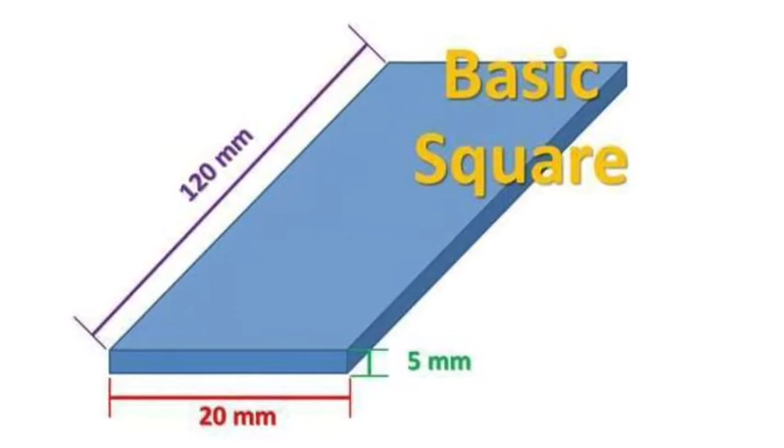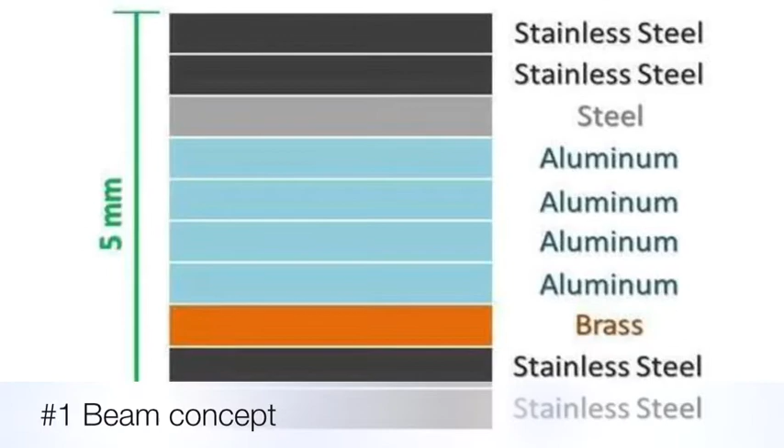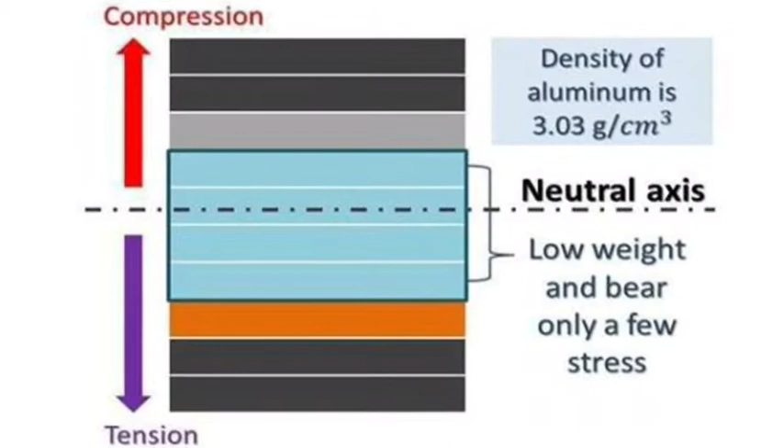We design our first beam as a basic square. We use only one plate of brass because its density is high and not quite strong. As well as the steel, we use only one plate, but stainless steel is much stronger, so we position it on both sides. And because the middle of the beam has to bear only a little stress, we use a low-weight material such as aluminum.

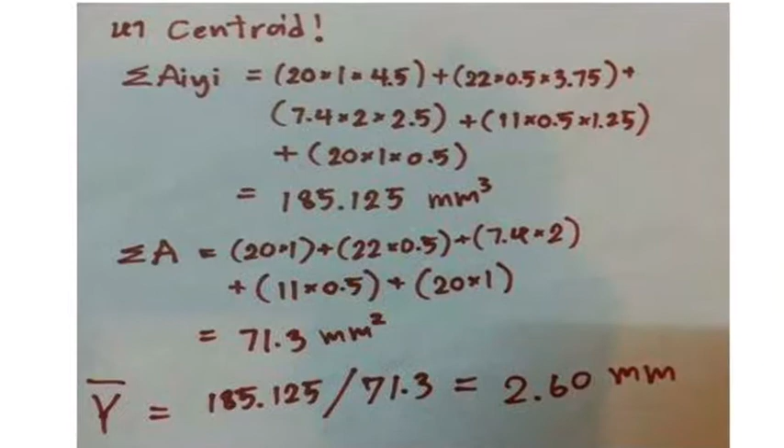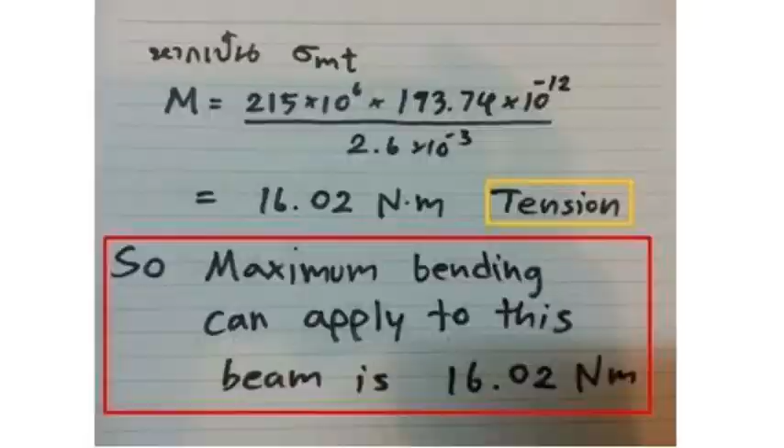Next is our calculation. So we decide to transform all of them into stainless steel. We have to find the centroid. It is 2.6 mm from the reference. We can calculate the maximum bending moment, where the tension side gives the maximum bending moment. Finally, we can find the maximum force is equal to 640.8 Newton.

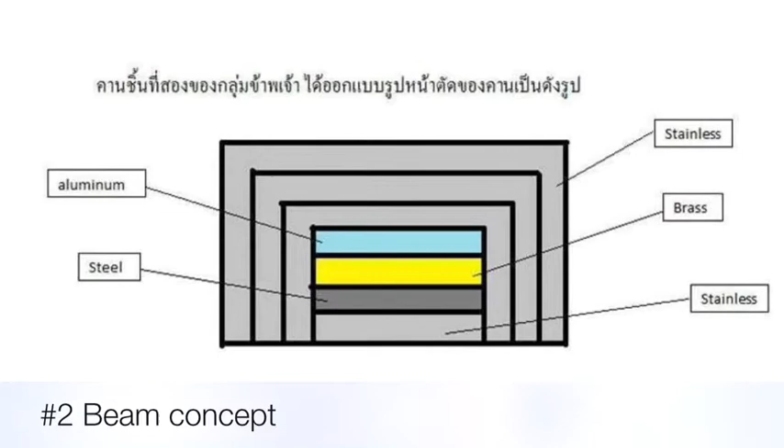In the second beam, we try to develop our beam. First, when the material is deformed, it will be difficult to deform further, so we bend the material into a C-shape because it can bear the vertical force, and we choose to bend stainless because stainless is stronger than the other materials. Second, stainless can bear the compression and tension force, so we arrange it on the top and the bottom of our beam.

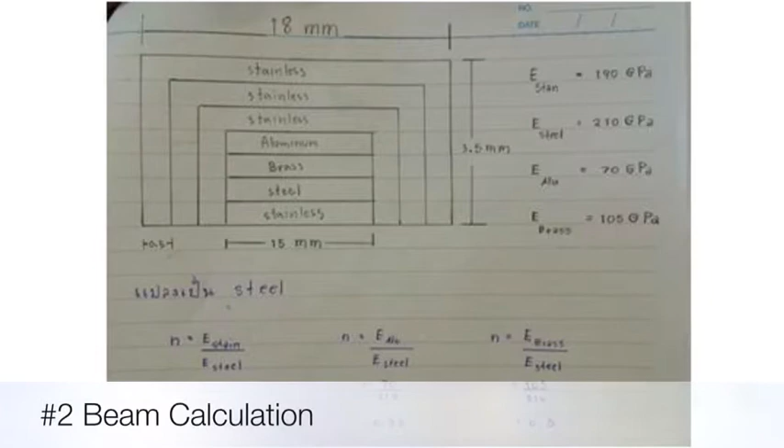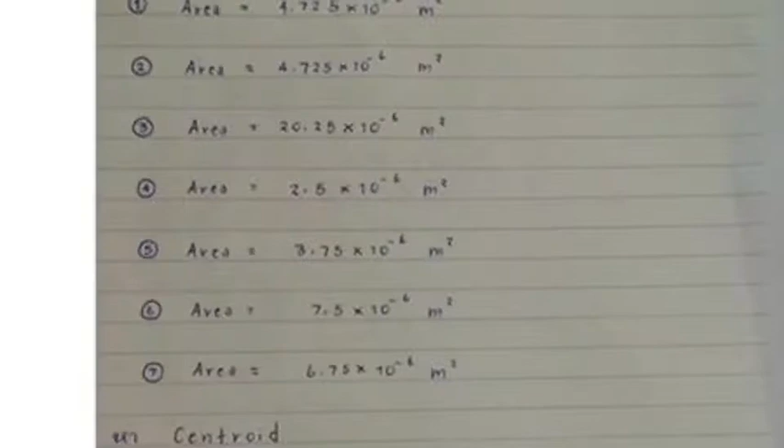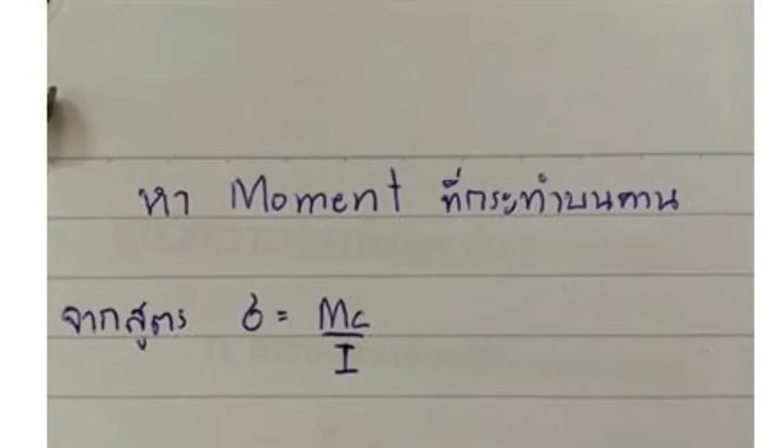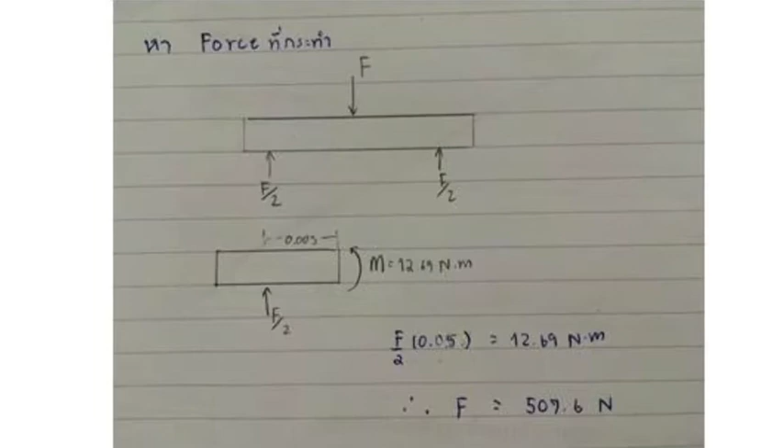The calculation of the second beam. This is the cross-section of the beam. We transform it to steel. After that, we calculate the centroid of the cross-section, that is 2.174 mm from the bottom, and then we can calculate the moment of inertia. Next, from the formula we can find the maximum bending moment. So the maximum bending moment that the beam can bear is 12.69 Newton meter, and the maximum load is 507.6 Newton.

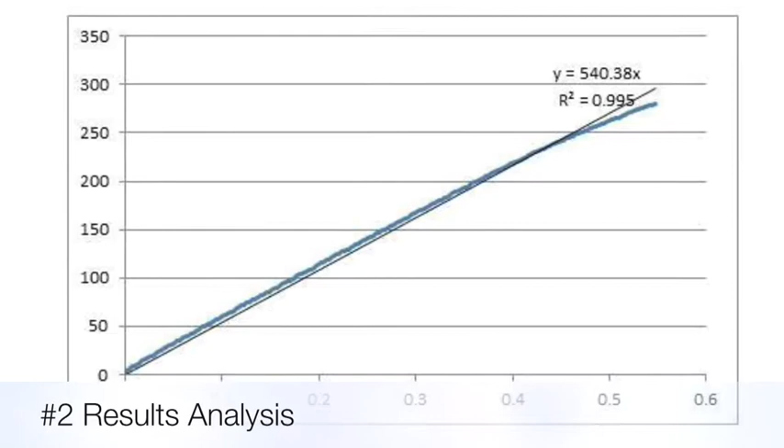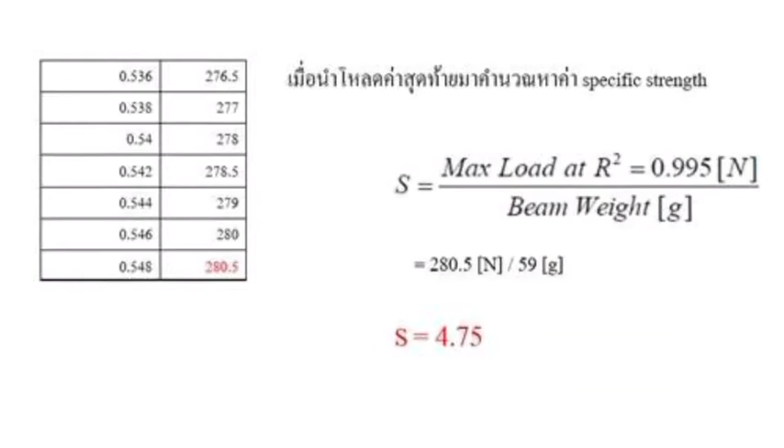The result of the second beam. This graph shows that the maximum load which the second beam can bear is 280.5 Newton. It can bear less than the calculation. Then we can calculate the specific strength by this formula. Unfortunately, the second beam's specific strength is just 4.75. The efficiency is very low. That is because the thickness is just 4 mm and the beam was complicated to build, so mistakes happened from the design.

Suggestions for development. We have two ideas about it. First, the design. Since the design directly affects building the beam, if the process is difficult and complicated, such as cutting and pulling down, it will affect the connection of the metal plates and leave a gap between the plates. So we have to design the beam simply, but with good efficiency, like our first beam.

Okay. Second, the process of building. The process of building is the most important part, especially cutting the metal plates. We can see in our second beam that it is a complicated design because we have to make a curve on it. It causes cutting mistakes and leaves a blank space inside, which is the weak point of our beam. In the case of pulling down, we have to make it a smooth, constant surface.